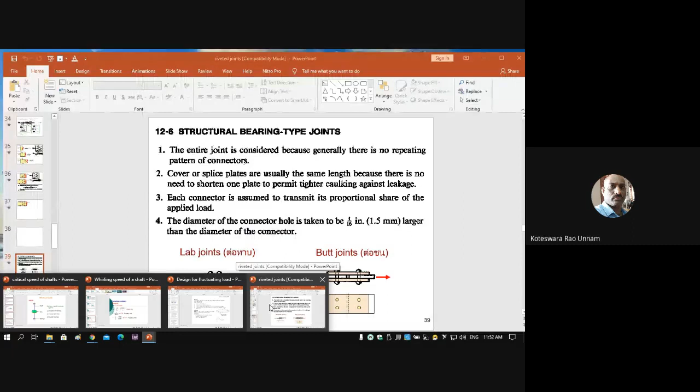So in yesterday's class we discussed about riveted joints, what is a riveted joint, and then what are the different types of riveted joints. We discussed all those things, so I think I am not going to go into that again. Basically there are two types of joints in case of riveted joints.

One is lap joint, the other one is butt joint. So if you look at the lap joint and butt joint and compare their relative merits and demerits - before going into the design, these things are also important. Why, in what situation would you prefer a lap joint? In what situation do you need to go for a butt joint? Why would we prefer the butt joint in case of boiler shells, or why would we use the lap joint in case of structures? We want to see that.

The only disadvantage in case of the lap joint is - see, this is the lap joint, subjected to some tensile force on either side, let us call it P. Now you can see the front view and top view of the joint here. This is the front view, and here this is the top plate and this is the bottom plate.

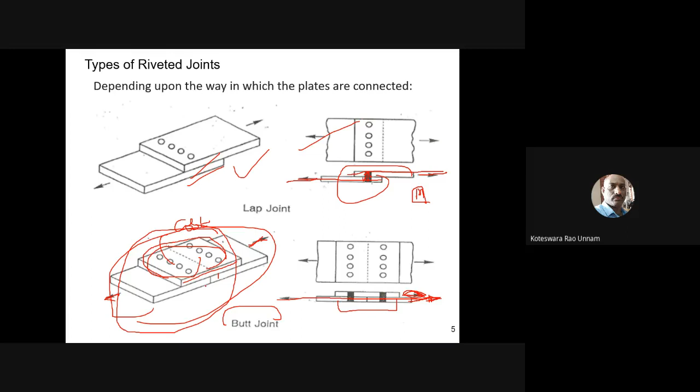So strength-wise, if you want to look at only the strength point of view, the butt joint is going to have more strength compared to the lap joint, because here only axial load is there.

There is no bending load in case of butt joint. Whereas if you look at the cost wise, lap joint is going to be the cheaper one when compared to the butt joint.

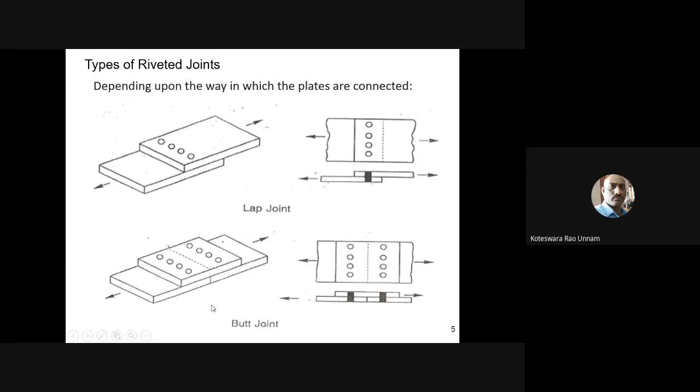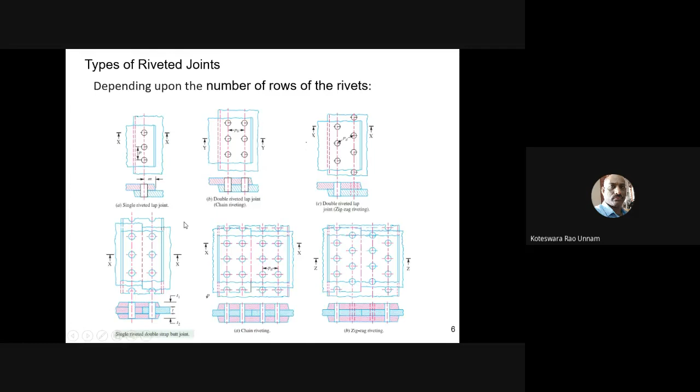After that we discussed different types of riveted joints based on the number of rows of rivets. We also discussed the type of riveting, chain riveting and zigzag riveting, and diamond riveting, and we discussed caulking and fullering.

These are the two processes used for preparing the tightness of the joint. The only difference between caulking and fullering is that in fullering, the width of the tool is equal to the thickness of the plate. Whatever thickness the plate has, the width of the tool is also that much. Whereas in caulking it is not so - you have a caulking tool with sharp edges. Generally people prefer fullering compared to caulking, because of the sharp edge of the caulking tool.

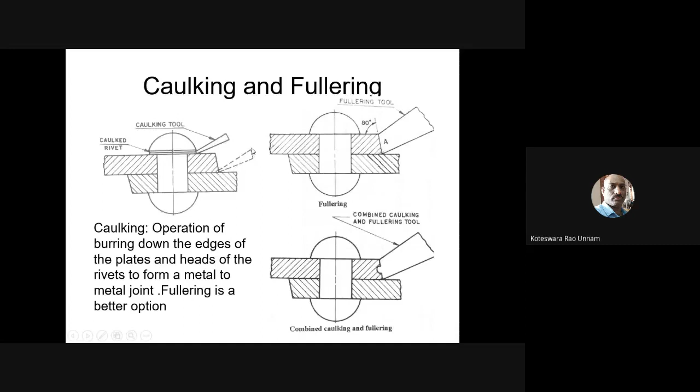Sometimes it may damage the joint. Instead of making it leak proof, it may damage the joint. That's why this process is not preferred compared to fullering.

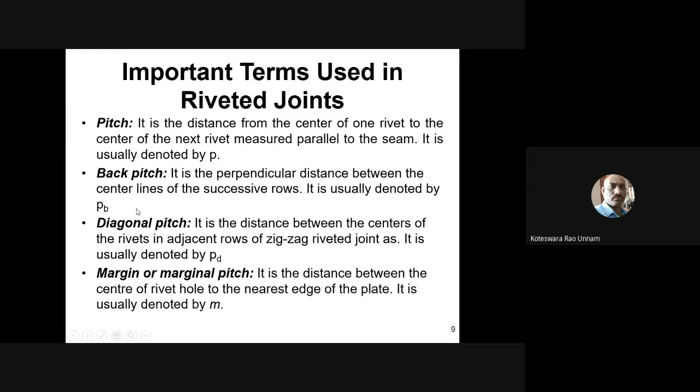Then after that we discussed different definitions for the pitches - pitch, back pitch or transverse pitch, diagonal pitch, and marginal pitch. Then I showed some pictures where you can identify the repeating section of a given joint, and based on that you can design the joint.

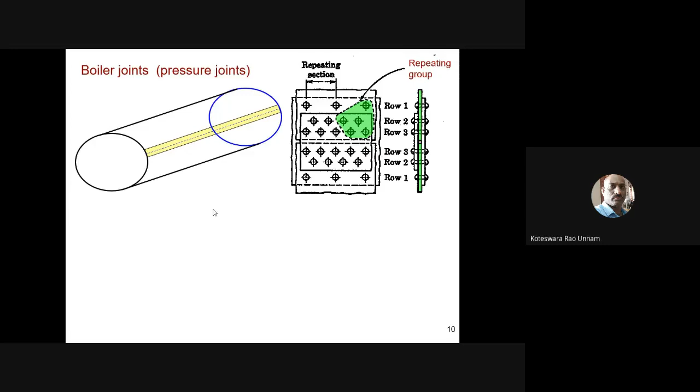This is another type of joint, a diamond type of joint. So today what we'll do is, first discuss how to identify the efficiency of the joint, then take up one problem on how to design the structural joints, and later we'll go to boiler joints also.

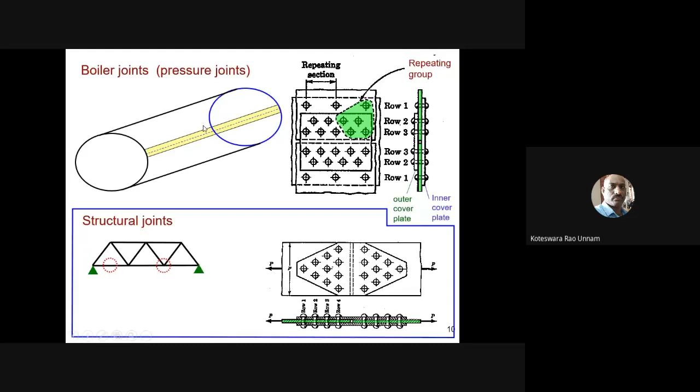Okay, I think we already discussed this. I am skipping all these things because already these things are discussed in the class. So this is the next topic - how to estimate the efficiency of the joint.

The efficiency of the riveted joint is defined as the ratio of strength of the joint to the strength of the solid plate. That is the definition. But what is the strength of the joint and what is the strength of the solid plate?

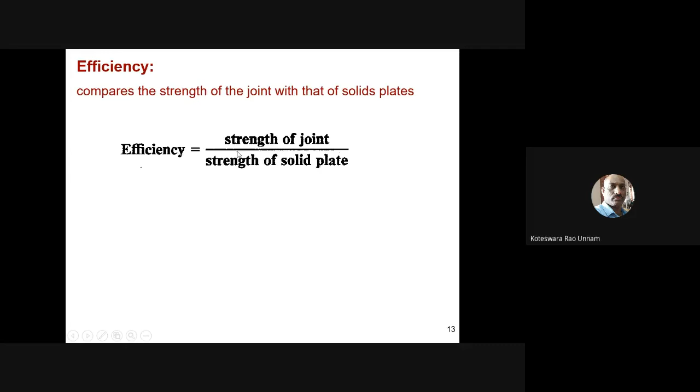Now here I have shown two pictures. This is a single plate without having a joint, so I'll call it a solid plate. Solid plate means a plate which has no joints.

In some application I require a plate of this much length, but since this much length of plate is not available, I take two pieces of plates and connect them by a riveted joint. So then I cannot call this a solid plate, because there is a joint here. Since you are making a joint to these two plates so that the length becomes like this, whatever may be the strength of this plate, it is not equal to the strength of the solid plate.

Why? Because here you have a joint. Whereas the solid plate is a continuous member, having no irregularity, nothing - it's continuous, you don't have any joint kind of thing in this case. Therefore, the strength of the solid plate is more than the strength of the riveted plate.

This riveted joint, whatever riveting you are doing - we already discussed that riveting process - we need to drill holes in the plates, or it need not be drilling, sometimes you go for punching process also. Either punching or drilling, you have to create holes in the plates. That means wherever a hole is there, geometric discontinuity is there, and because of that there is stress concentration.

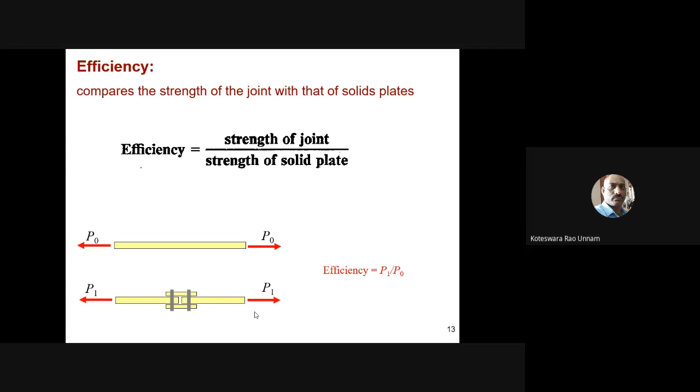First we'll discuss that. Then we'll calculate, estimate if that is going to be the failure mode, and what is the strength of the joint. So we'll estimate those things. Then based on that we can calculate the efficiency of the joint.

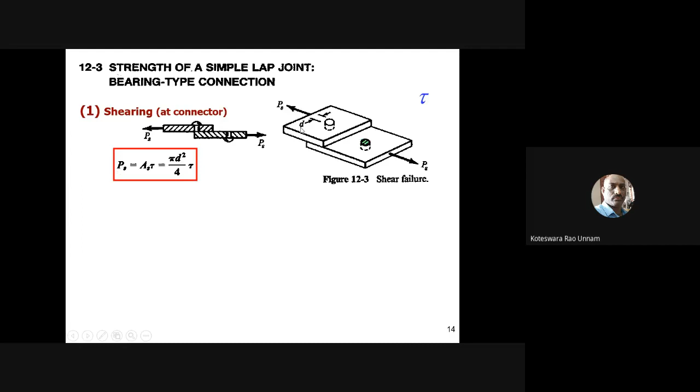Then coming to the next type of failure. So the first type of failure is the rivet shearing off at the connection. That is the first type of failure.

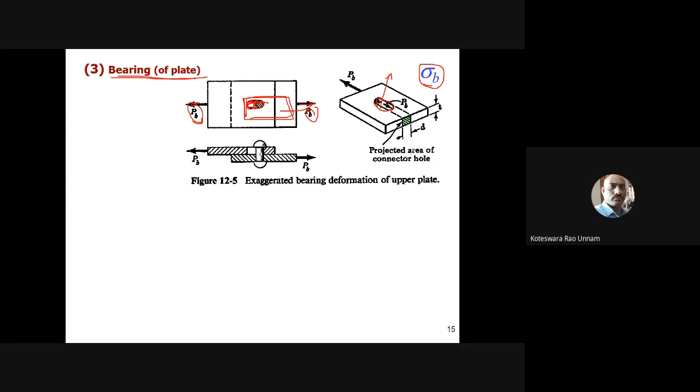So to identify the crushing strength or bearing strength of the joint, both are the same. Crushing and bearing, sometimes we'll call it bearing stress and sometimes crushing stress, both are the same only. If you want to estimate that, if you know the allowable crushing stress, multiplied by the crushing area, you will get the crushing strength. Like what we discussed in previous classes, whenever there is bearing stress, you need to make use of the concept of projected area.

So here the projected area of the connector hole, if I take this hole and project it onto the plate, this is the area you are going to get. So the projected area is nothing but this dimension D, which is the diameter of the hole, and this height is the thickness of the plate. Therefore your projected area is going to be D into T only.

So the bearing strength of the joint is sigma B, the allowable bearing or crushing stress, multiplied by the bearing area, which is D into T. So you'll get the bearing strength of the joint, PB, which is nothing but AB into sigma B. Your AB is the bearing area or projected area, which is D into T, multiplied by sigma B. So that's how I can calculate PB.

But so far I have shown three kinds of failures. In all three kinds of failure, I considered only one rivet. If you take this, or if you take this, or even in this case also, I've taken only one rivet.

Suppose I have more than one rivet, so if it is a lap joint having only one row, and I go for another row, that means I have one more rivet. In that case, if I want to calculate the shearing strength of the rivets, with two rivets, I need to multiply this by 2, on either side.

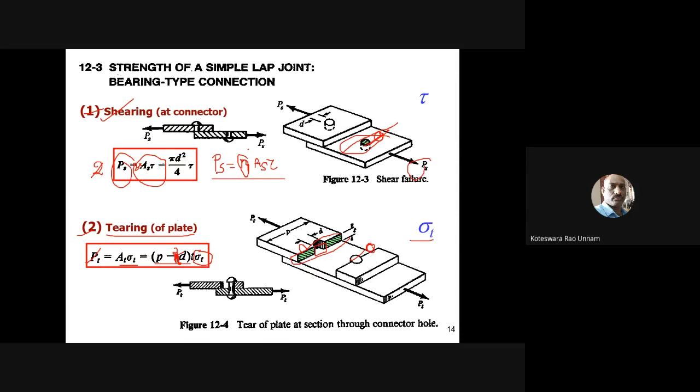If there is only one hole, I take N equal to 1, so it becomes P minus D. If I have more than one hole, there is material removal in more than one location, so if two holes are there, I take P minus 2D, and if 3 holes are there, P minus 3D, something like that.

Similarly, in case of bearing failure, if I have more than one rivet, I need to take this formula and multiply it by N, where N is the number of rivets. For a single rivet, these are the equations; if you have multiple rivets, you need to multiply all these strengths by the number of rivets also.

In case of the first and last one, tearing corresponds to the tensile strength of the plate, shearing corresponds to the rivet, and bearing also corresponds to the plate, but it depends upon the number of rivets also.

Now I'll summarize: generally these are the three kinds of failures a joint can have. The joint is going to fail either because the plate may tear off, or the rivet may shear off, or the plate may fail by bearing crushing stress at the location of the rivet.

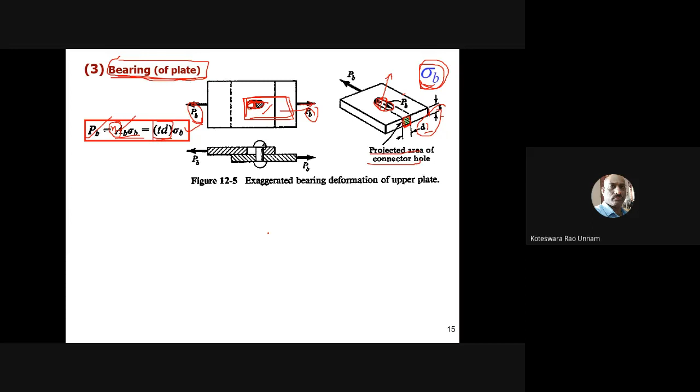Apart from these three, you have two more failures: tearing of the plate at the margin, and shearing of the plate at the margin. These two are most unlikely to occur.

Why do I say most unlikely to occur? Because if we provide proper margin M, as we discussed with marginal pitch, these two kinds of failures are not going to happen. That's why they are unlikely to occur in all the joints.

There are standards for how much margin you need to provide. Generally, for all joints, the margin should be 1.5 times D, where D is the diameter of the hole. If you provide this, you can avoid shearing of the connector or shearing of the plate behind the connector.

And again, the tearing out of the plate at the edge—here the plate tears off into two pieces at the edge. This kind of failure can also be avoided just by providing a proper margin to the joint.

Margin is the distance between the center of the hole to the edge of the plate. If sufficient margin is provided, these two kinds of failures can be avoided in the joint. That's why while designing the joint, we only consider the first three failures. These two types of failures can be avoided just by considering the proper margin, so we won't consider these things while designing the joints.

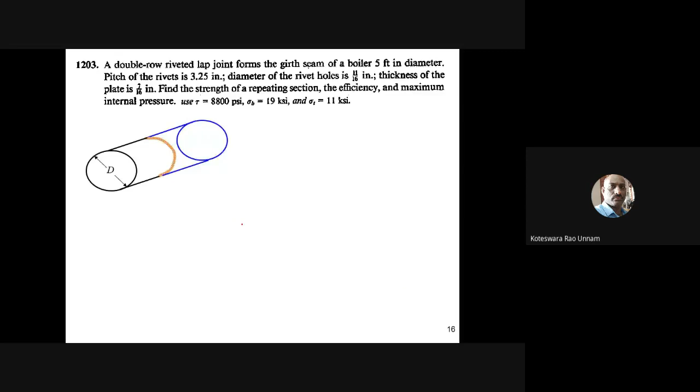Then if you know the strength of the joint, you use that formula to compute the efficiency of the joint. By comparing the strength of this joint to the strength of the solid plate, we get the efficiency of the joint. So this is how we identify the efficiency of the joint.

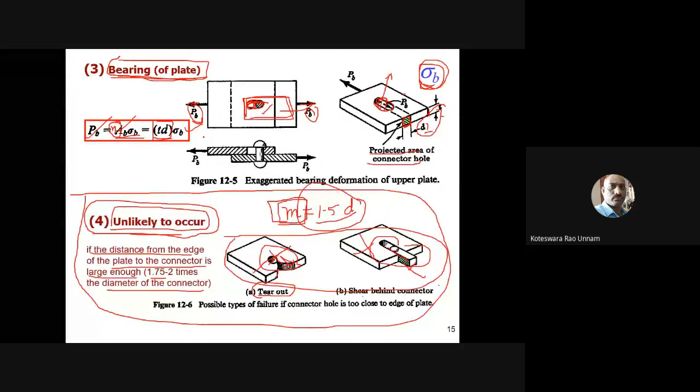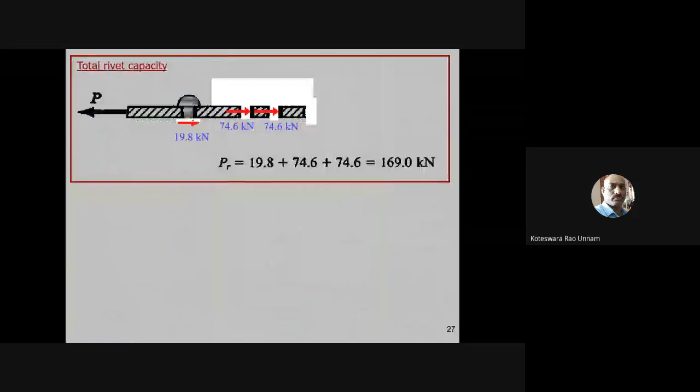So then what we'll do is take up some problems on this. First, I'll take a structural joint and show how to design it, then we'll go for boiler joints also. I'll skip these for now, we'll come back and discuss them later. I'll go through the problems right away on structural joints.

So this is the first problem we are going to discuss. Find the safe load. It is a lap joint only. Generally, in case of structures, we use only lap joints, like trusses or bridge structures, wherever it is there, railway bridges, we use this kind of diamond joint. What is the reason they go for the diamond joint here?

If you go for this kind of joint, the material required for the plate is less. If you go for the solid plate, that means I require this much plate. So here you are having less area for the plate compared to this. That is the advantage of this diamond joint.

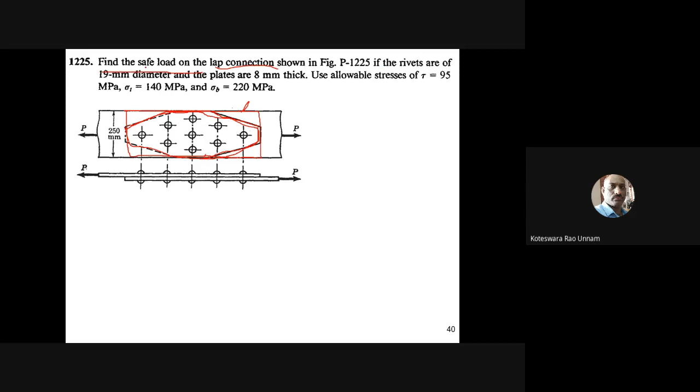Okay, so now we'll see how we can design this joint. But it is not a design—what he asked is, find the safe load for the lap connection, shown in the figure. Connection is nothing but joint only. If the rivets are of 19 mm diameter and the plates are 8 mm thick.

Use allowable stress: tau, meaning shear stress, is 95 MPa; sigma T is 140 MPa; sigma B is 220 MPa. So he has given all the allowable stresses. That is allowable stress in tension, which is nothing but tearing strength, 140 MPa. Bearing stress is 220 MPa, and allowable shear stress is 95 MPa.

He has given the joint also, and he has given how many number of rows are in the joint also. 1, 2, 3, 4, 5 rows are there.

So here we need to identify what load this joint can carry—that is the safe load, the maximum load it can carry. We want to compute that. For that, like I already told, we need to estimate all three load carrying capacities: shearing strength, bearing strength, and tearing strength.

Out of all three, we need to take the least one, and from the least value, you can take that as the load the joint can carry. So that is the answer for that.

So first what we'll do is consider the shearing strength. We already saw the formula for the shearing strength. If there are a number of rivets, you need to multiply that by the number of rivets also, but first we'll compute for one rivet. So for one rivet, what is the shearing strength or shearing capacity?

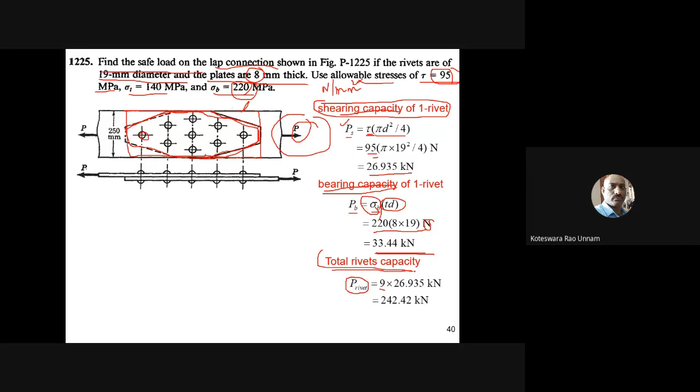Why have I taken the total rivets carrying capacity? As we already mentioned, we need to always take the lowest one. So out of this bearing capacity and shearing capacity, which one is the least? Here, the shearing capacity is the least one. So I am not going to design the joint based on the bearing capacity. Comparing these two, the rivet is the weaker one compared to the bearing capacity.

So I will estimate the load carrying capacity based on the rivet's shear. Therefore, it is 9 into, for each rivet, 26.935. If I compute that, I get 242.42 kilonewtons. Or similarly, you can take the bearing capacity, multiply it by 9 as well. Then comparing these two, whichever is least, I will take that as the load carrying capacity of the rivets.

Then we have checked only two things. There is another thing, the tearing capacity of the plate, which we also need to consider.

To find that, first we need to identify the diameter of the hole. He has given the diameter of the rivet, but we'll use the empirical relation for diameter of the hole. As I mentioned in the previous class, diameter of the rivet hole is diameter of the rivet plus 1.5 mm. Or you can use the data book: corresponding to rivet diameter 19 mm, find the diameter of the hole there. Using the empirical relation, the diameter of the rivet hole is 20.5 mm.

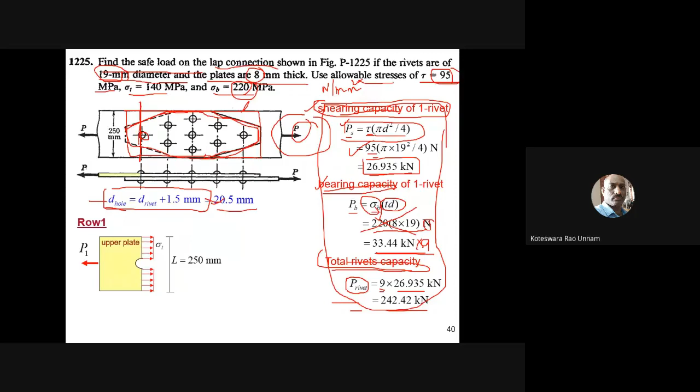Now I'll calculate the tearing strength of the plates. Considering this row, if the plate tears off at this location, there may be a chance it tears here, or here, or here. The other side is the same at these locations. So if I consider up to three sections, that is sufficient. Now I will explore all three possible values: the plate may tear off here, or here, or here.

If I take this option, what is the tearing strength of the plate? This is the section view. If the plate tears off at this location, this is the allowable tensile stress or tearing stress in the component. I am applying a load, let's say PT. I'm not taking it directly as PT because we have different possibilities of failure by tearing, so I'll take P1, P2, P3, something like that.

If I take a section here, this is a failure. So what is the allowable load here? You can take this length, which he has given as 250 mm, minus the diameter of the rivet hole, which is 20.5, multiplied by the thickness of the plate.

You need to take the thickness of the plate, given as 8 mm, multiplied by the allowable sigma t, to get your P1. P1 is nothing but sigma t into L minus diameter of the hole into T. If I substitute the numericals given in the problem, we get 257 kilonewtons.

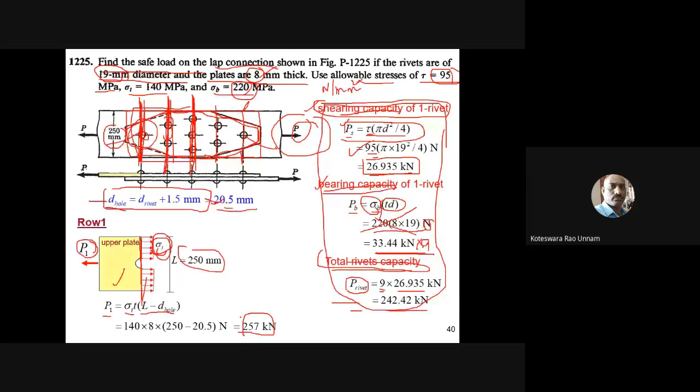But I cannot simply take this as the tearing strength of the plate, because there are two more ways of failure by tearing. It may tear off here, or here, or here also. So I need to estimate the tearing strength when the plate tears off at these other locations. That's why I'm not taking this as the final tearing strength of the plate — this is only one instant.

Next I will take, if the plate is tearing off here, what is its strength then? If it is something like this, this is the section of the plate when it is tearing off at this location. But before going to the tearing off, we need to understand one important point.

If this plate is broken into two pieces, this side will come out like this, and this side will come out like this. Before this can happen, you have a rivet here. If this rivet fails, then only the plate can move and tear off like this.

As long as this joint is not failed, this plate cannot move like this. So in order for tearing to take place at this section, first this rivet should fail — meaning the rivet should fail in shear here. So always the rivets will fail in shear.

So to estimate the tearing capacity of the plate at this location, you need to consider the shearing strength of this rivet, and then at this location, the tearing strength. I have taken that as P2.

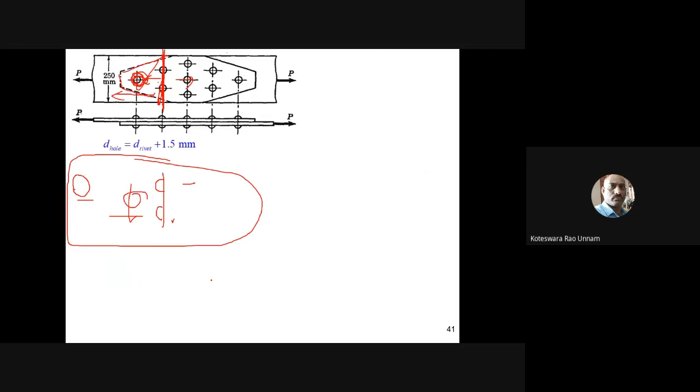As I mentioned earlier, here you have two holes, not a single hole. In the previous case with a single hole, I took L minus D — L, or P, or sometimes pitch itself. Since at this location you have two holes, you have to take L minus 2D instead, which is what I've taken here.

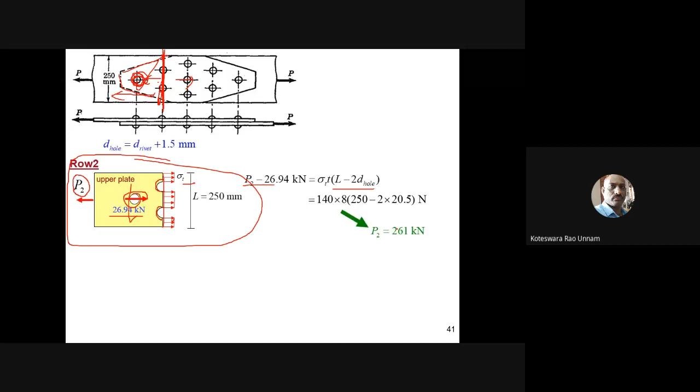If I compute and simplify this, I get P2 as 261 kilonewtons. Similarly, I'll consider if the tearing takes place across these three rivets — what is the tearing strength then? This becomes the free body diagram now. The tearing happens at this location only when these three rivets have failed.

So I need to consider the shearing strength of these three rivets plus the tearing strength of the plate. That sum equals your P3. P3 is equal to the shearing capacity of the three rivets plus the tearing capacity of the plate at this location, which is sigma T into L minus 3D, since you have three holes here.

So if I substitute the numericals for this and simplify, I'll get P3 as 291.9 kilonewtons. Now you have P1, P2, P3. Out of these three, you have to take the least one as the tearing strength of the plate.

So P1 you got as 257. Then you got 261. Then you got 291. Now out of all these three, the least one is going to be this one: 257 kilonewtons is going to be the least value.

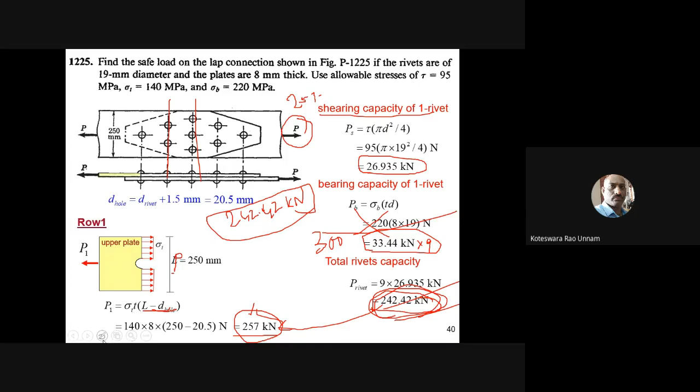So this is how you can design the joint, or here it's not a design actually, it is how you can calculate the safest load the joint can carry. So this is how you can do that.

So maybe in the last thing, okay, so I estimated the efficiency also. Efficiency is nothing but simply the least of those three. So I have taken that 242.42 is the least load carrying capacity. Then efficiency of joint is nothing but if you take the entire plate as a single one, the width of the plate is 250 and thickness is 8.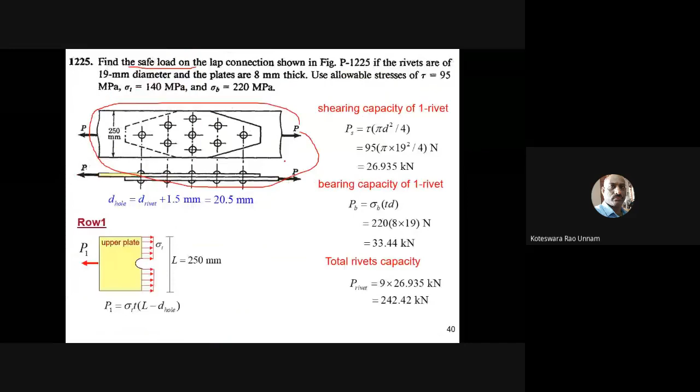This is the allowable tensile stress, and width here taken as 250 mm and thickness is 8 mm. So this is the strength of our solid plate. So 140 is the allowable tensile stress, that's what he has given in the problem itself. So from that you can calculate the efficiency of the joint also.

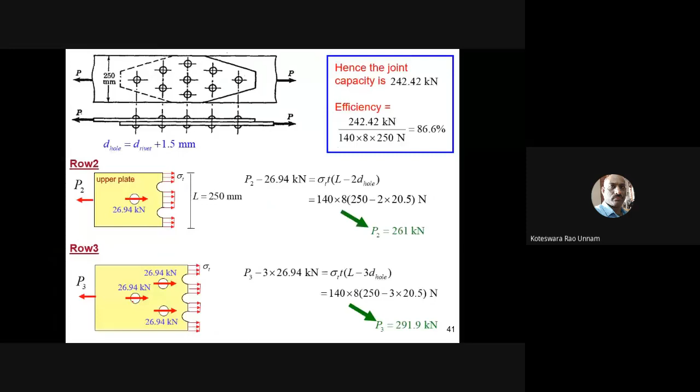You can see that the efficiency is definitely less than 100%. Here we got only 86.6% as the efficiency for the joint. So like this you can find the efficiency of joint in case of structural joints.

So similarly, we can consider the boiler joints also. Maybe we'll see those things in the coming classes. So today I'll stop at this point. We'll continue in the next class.

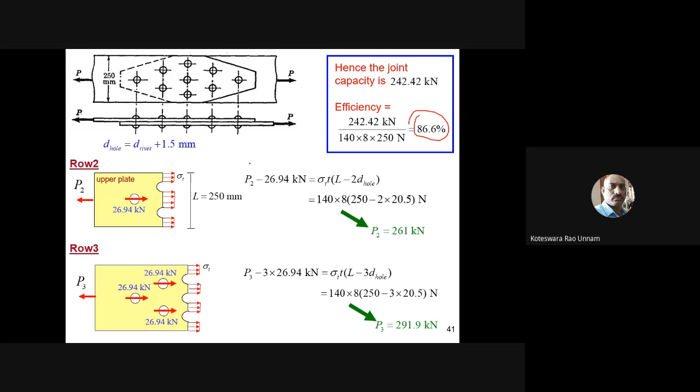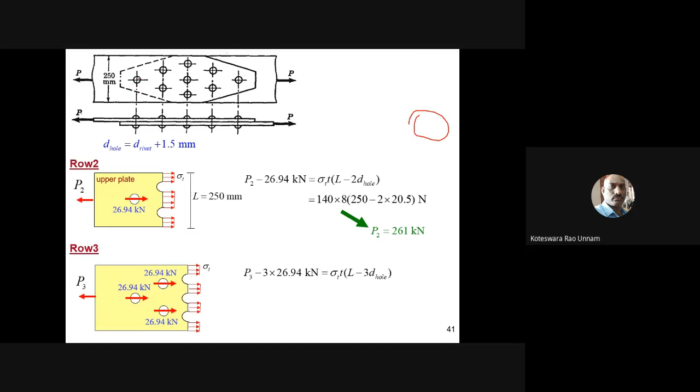Only important point here while designing this one is, shearing and bearing capacity calculation is straightforward. Only while calculating the tearing strength, you need to consider: if the plate is tearing off here, you have to consider only tearing strength. If it is tearing off here, you need to consider shearing strength of this rivet plus tearing strength of the plate at this location. Similarly, in this location also.

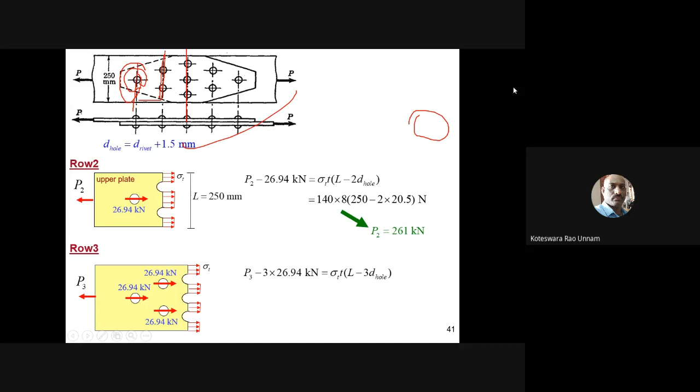Out of all those three, again you need to choose the least value. So from that least value, again you need to compare PT, PS, PB. Out of all three, you have to take again the least value, least of PS, PB and PT. Then that will be taken as the strength of the joint. So from that you can calculate or estimate the efficiency of the joint. Right? I think it is clear. I hope it is clear. If any doubt, you can ask, or else we'll discuss in the next class also.